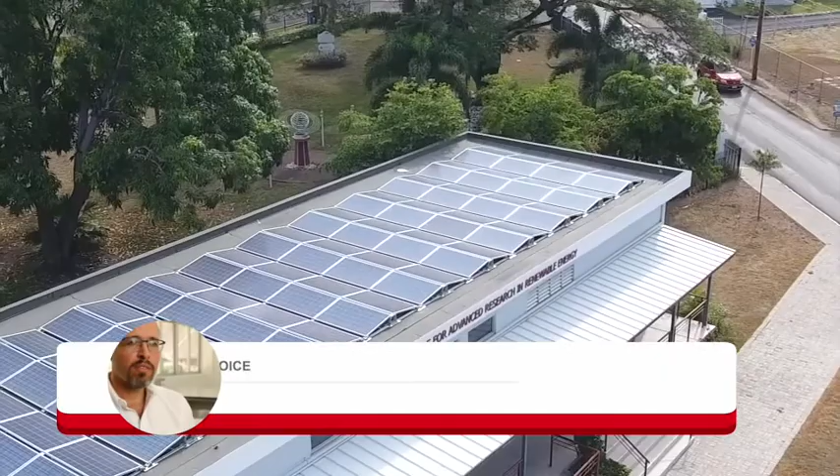Now, can you imagine if every building in Jamaica was employing this type of technology, energy efficient architecture, and renewable energy? It would mean that our demand for fossil fuel would reduce. Any contaminants, any pollutants to our environment would be reduced as well.

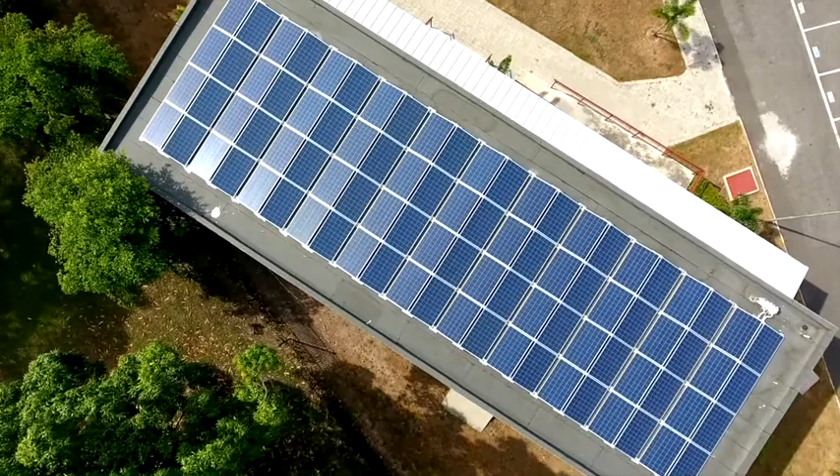Welcome to the region's first net zero energy building, located at the University of the West Indies Mona campus. This beautiful, climate-smart, and state-of-the-art facility hosts the Center for Advanced Research in Renewable Energy. It is the result of efforts from the Institute of Sustainable Development at UWI in partnership with the Global Environment Facility and the United Nations Environment Programme.

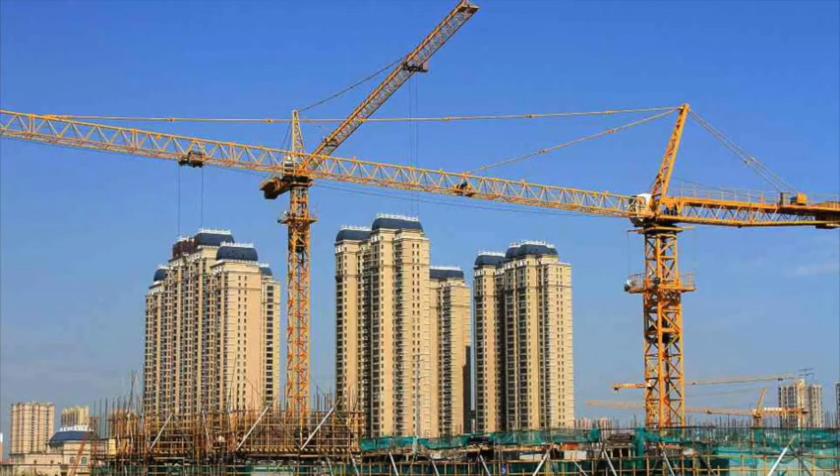World energy demand is projected to grow by more than 50% by 2030, with 75% of that coming from developing countries. This is the result of several factors, including China and India's rapid growth, world population increase, and the unmet demand of 30% of the world's population without reliable energy supplies.

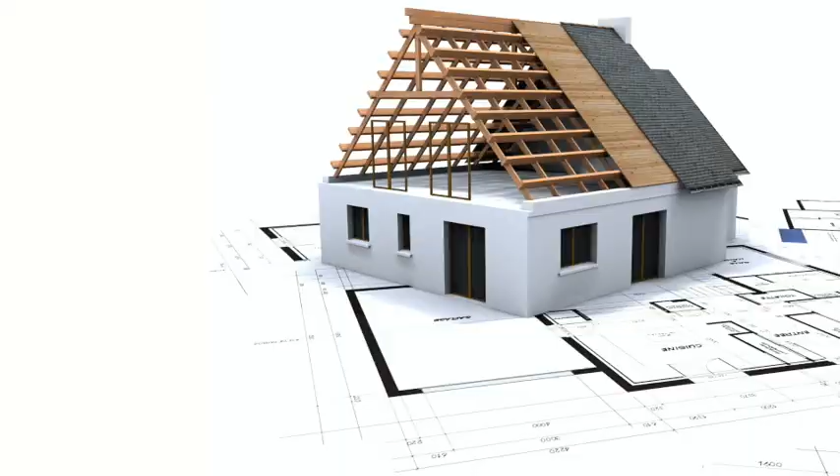Increased demand for energy services will make it very difficult to meet carbon reduction targets, resolve climate change problems, and meet national needs for energy security without significant improvements in energy efficiency and productivity. It is important to improve the energy performance of buildings, as the residential sector alone accounts for 25% of total end-use demand and 19% of global GHG emissions. That means even basic improvements in building efficiency would reduce world end-use demand for energy by 30 quadrillion BTU.

The Institute of Sustainable Development at the University of the West Indies pioneered a project to develop innovative solutions for Jamaica and the Caribbean. And adaptation now requires us to think, well, how do we get efficient cooling? Because we're going into a warmer world. How do we use, for example, more efficient usage of water? How do we use shades? And so the whole building and construction industry also has to look at adaptation as a key part of living in this world as we go forward. And hence the whole idea of efficient buildings playing a role both in mitigation and in adaptation.

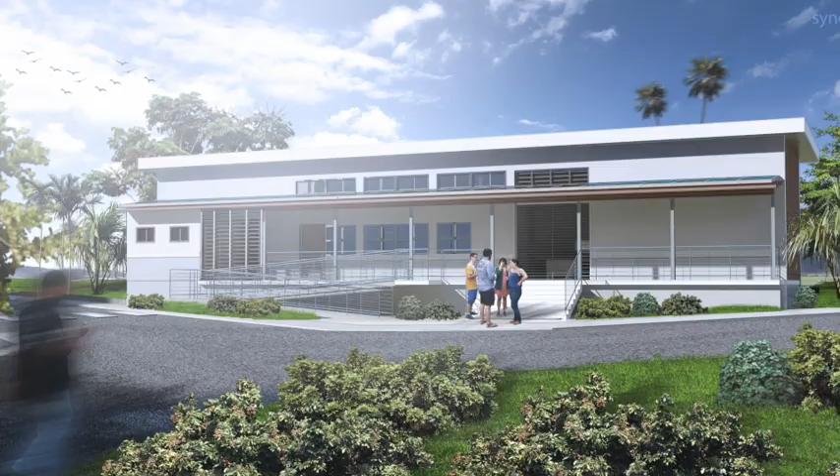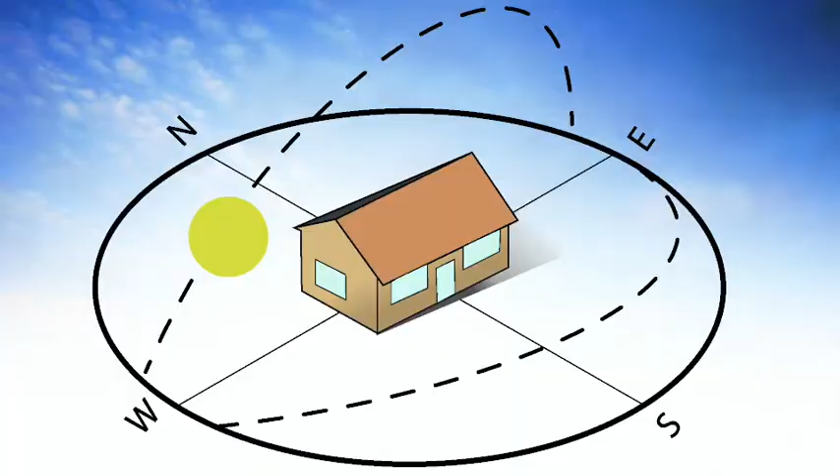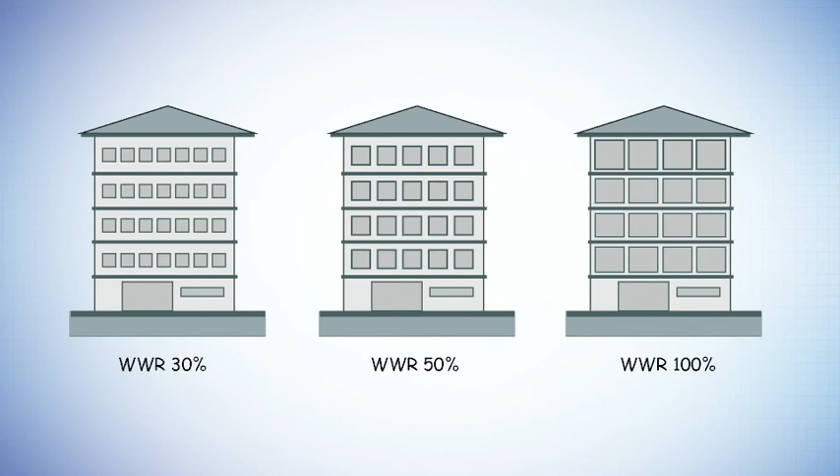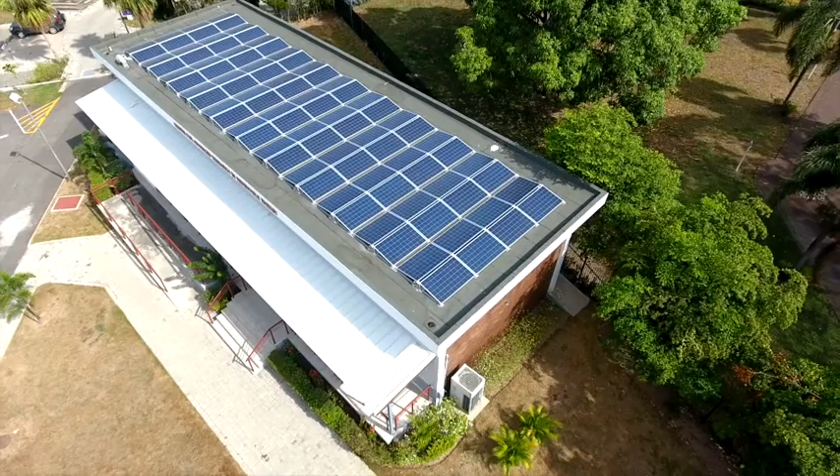The second feature is its use of renewable energy, in this case, solar power, to meet the building's residual energy demand. Because the building is so energy efficient, it will actually export power much of the time. A lot of work has been put into making this building possible, and it would be a waste if it didn't get itself into the building code. Just in terms of the orientation of the building, measuring where the sun comes from and so on, to minimize the heat.

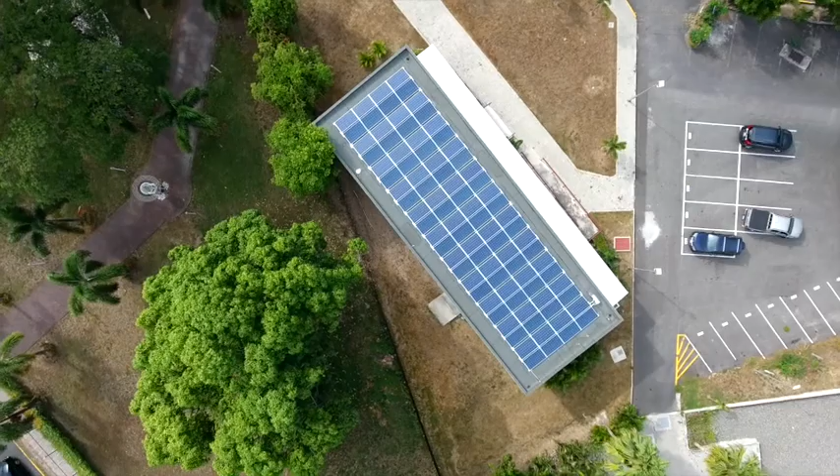Let us go into more detail. We chose the orientation of the building to minimize heat gain from the sun, make use of natural breeze, and maximize renewable energy production. You can see the way that the building has been oriented to take account of the sun. Also, look at how shading has been used on the south side to help keep the building cool. The building was designed to let in light rather than heat, so there is little need to switch the lights on.

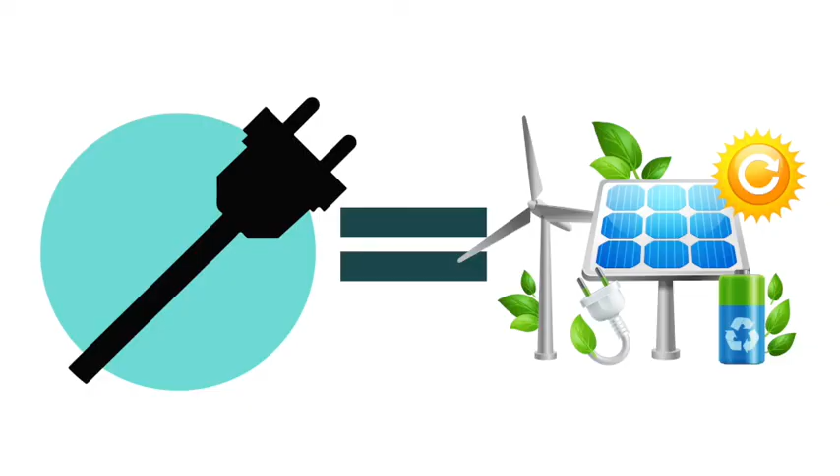Now, what really is a net zero building? Or an Energy Plus building? A net zero building is a building whose total amount of energy used roughly equals the renewable energy created on the site or at other renewable energy sources. For example, our building generates enough energy on site from renewable sources to meet its own needs. As a result, net zero buildings do not increase the amount of greenhouse gases in the atmosphere.

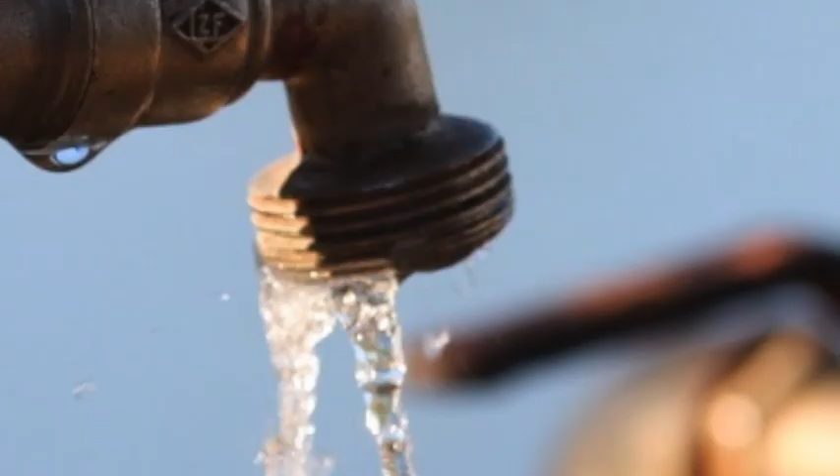Did you know buildings account for nearly 40% of total world resource demand and 1/3 of global greenhouse gas emissions? If all future buildings were built like this, we could solve climate change. It does not stop there. This building was also designed to reduce water consumption. Half of humanity now lives in water-stressed areas, so this could be a very important feature in new building design from now on.

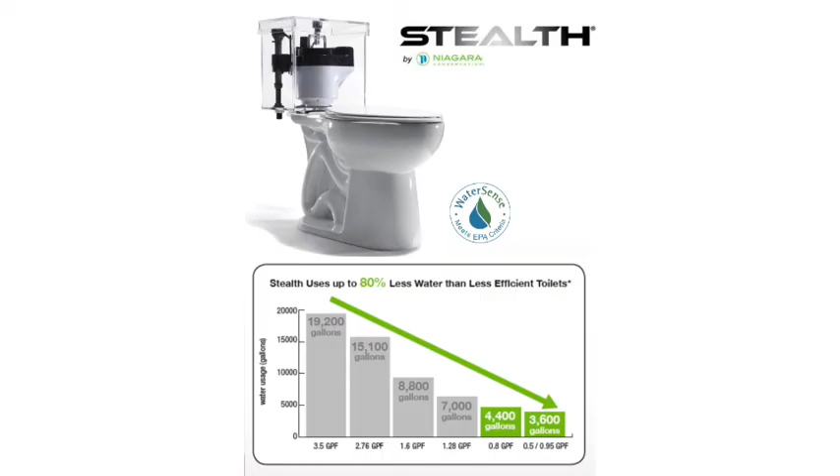As you can see here, the building collects rainwater that is stored and used to flush toilets and urinals. The toilets use 80% less water than usual to make sure that the building does not run out of water. We could also use the stored rainwater to put out a fire, adding a safety feature for the building's occupants. So this simple design feature serves many valuable purposes.

This building is a showcase for current best practices in the built environment and is an example of what offices and housing will look like in the future. Let's go inside to take a better look at these best practices. Best practices in this building include an energy-efficient layout, window detailing, and efficient lighting and cooling.

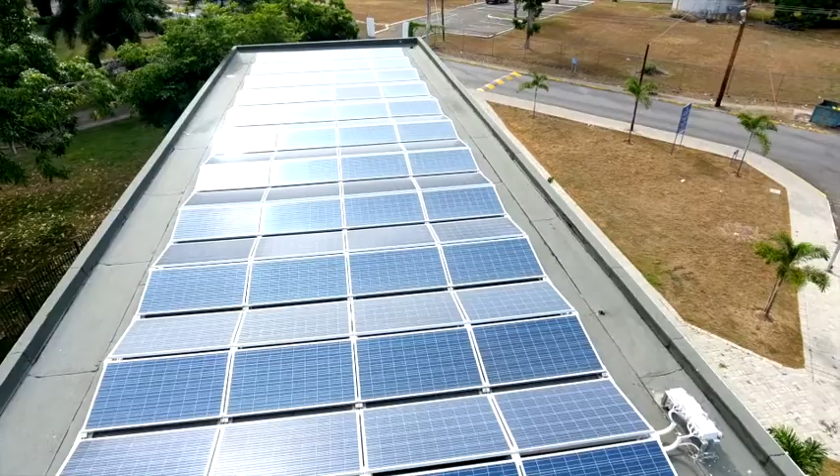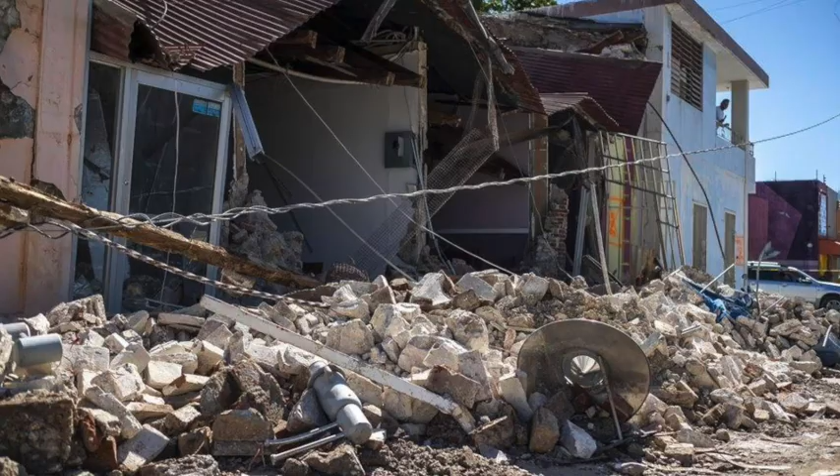The use of PV solar panels on the building can also provide energy to the grid when the building generates more than it needs. The building design even makes it resilient to changing climate conditions, storms, floods, and earthquakes. Raised flooring means it is above floodwater levels, while the robust structural engineering makes it resistant to strong tremors.

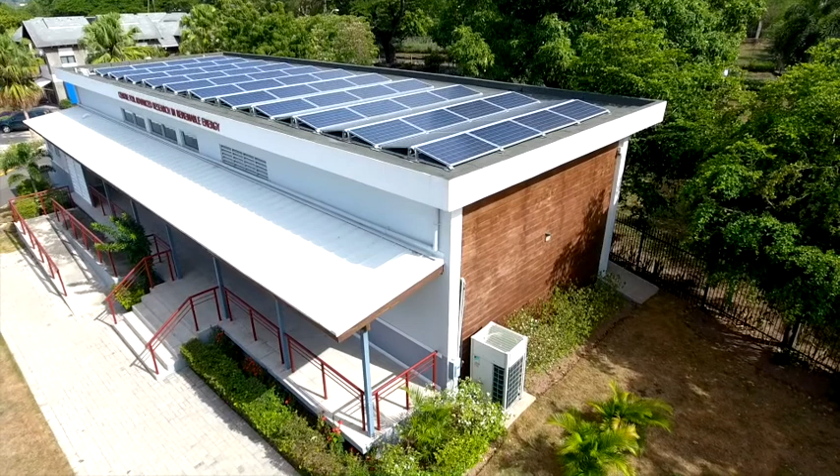At 2,400 square feet, the building was built specifically to produce enough or surplus energy for its needs. Please note that this is larger than the average house size in Jamaica, so you could easily be living in a building designed like this in future. This project is more than a building. It was designed to provide practical solutions.

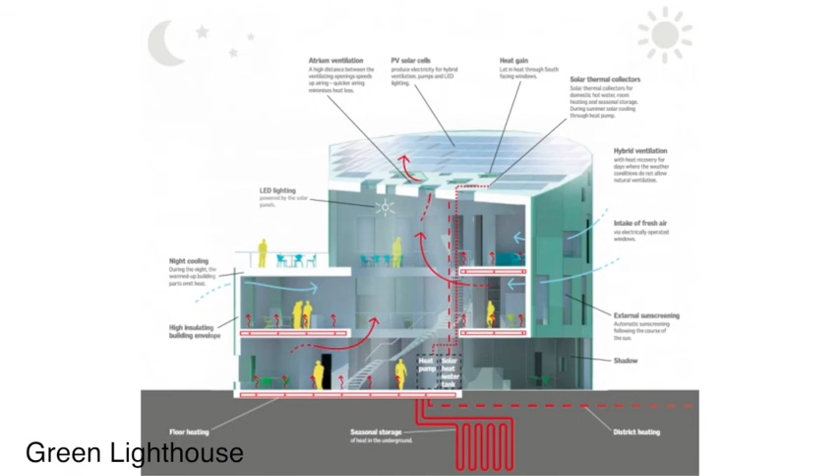Buildings like this show how Jamaica could improve energy efficiency, make everyone better off by increasing disposable income, stimulate the economy, reduce Jamaica's fuel import bill, soften our exposure to energy price volatility, and reduce the national contribution to climate change. What is not to like?

One of the things that we want to do is ensure that every new building in Jamaica from now on is built to somewhere closer to net zero standard. And we now know how to put up buildings that actually generate as much power as they consume, which means that those buildings are actually not generating any net demand on the grid at all.

Even if we could make every new building like this, it will take many years, perhaps decades, to change the entire building stock. That raises an important question. How can we continue to make progress in that time? This project was designed to answer that question too. Its second phase was to show how much we could gain from retrofitting existing buildings.

So we upgraded a large, busy building, the National Housing Trust headquarters, to modern standards of energy efficiency. We reduced heat by improving window films that allow more light in, but reflect unwanted heat back out. We insulated the roof, which can reduce heat by as much as 80%.

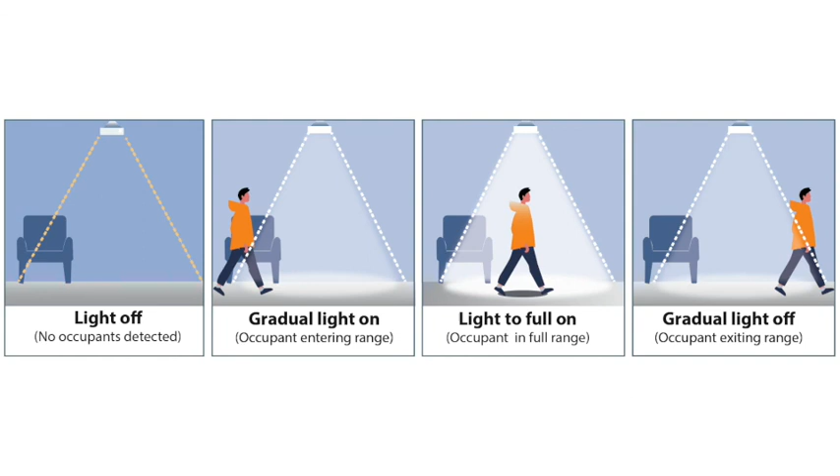To reduce electrical consumption, we upgraded lighting fixtures from fluorescent to LED, which give more light for less power. We also installed occupancy sensors that turn the lights off automatically when no one is in the room. We upgraded the old air conditioning and cooling system to modern standards that will save a lot of power.

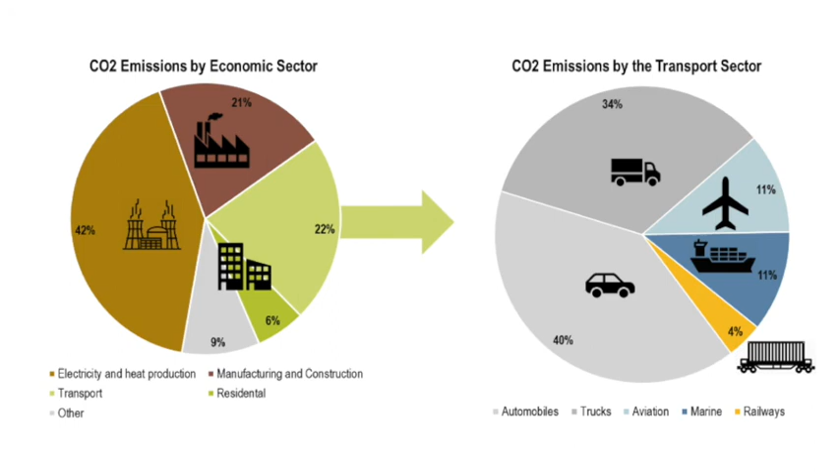The solution to many of the world's most pressing problems, the need to support more people at a higher standard of living while also solving climate change, lies in building better, smarter buildings. This pioneering world-class project shows how that can be done. This building is a symbol of Jamaica's commitment to tackling the world's great environmental challenges. It is the first of its kind in Jamaica and the Caribbean.

But the people who designed and delivered this project want to share the lessons learned so we can see more buildings like this in future. The project's two principal investigators are Professors Anthony Clayton and the late Tara Dasgupta. The project manager is Kevin Rodriguez, and the project administrator is Engelbert Davis. We are always willing to share what we know with audiences and partners across the region and beyond. This is a site for learning and creating.

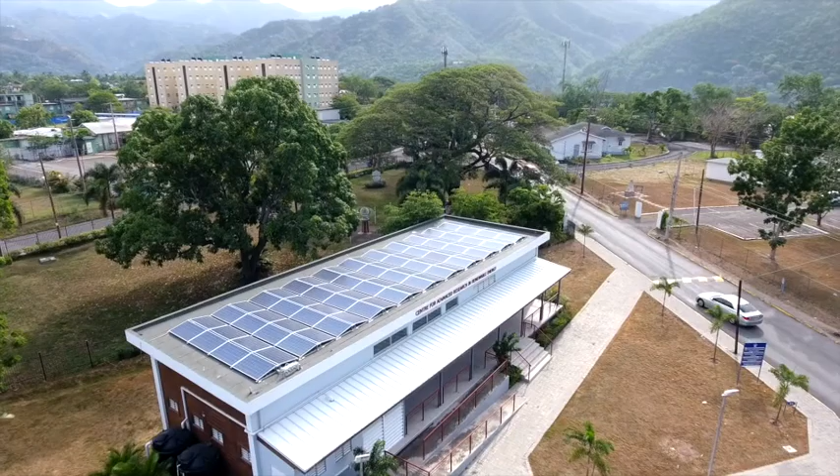We would like to thank the stakeholders, contributors, and co-financiers of the project, who include the University of the West Indies, the University of Technology, the Scientific Research Council of Jamaica, Jamaica Public Service Company, Jamaica Institution of Engineers, Jamaican Institute of Architects, Office of Disaster Preparedness and Emergency Management, Caribbean Academy of Sciences Jamaica, the architects and engineers who worked on the project, the CARICOM Energy Secretariat, and the GIZ.

Feel free to use this facility as a site for knowledge transfer by contacting us today. And please be sure to come and visit and get a glimpse into the future.